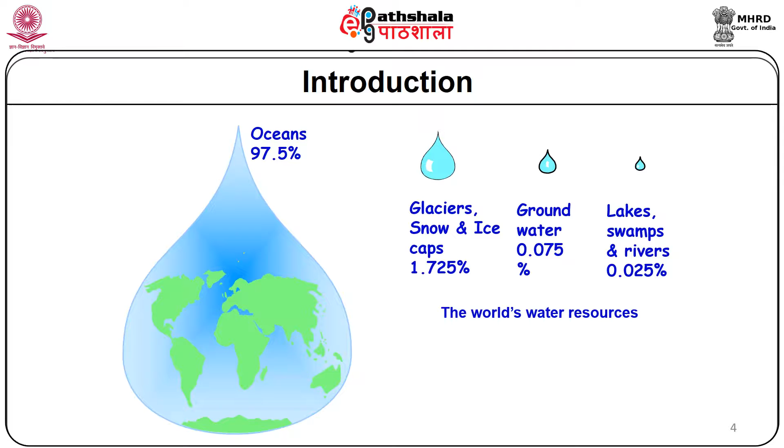As far as distribution of total water is concerned, ocean comprises of around 97.5% of the water. Glaciers, snow and ice caps constitute about 1.725% of total water, whereas groundwater just accounts for 0.075%, lakes, swamps and rivers 0.025%. The world water resources just described clearly show that the fresh water for human consumption is not much.

In the last century, the world population tripled and the use of water grew 6 times. So, water consumption had been much more than the actual population growth. It is estimated that by 2030, the demand for water will be 40% more than it is currently and 50% higher in the most rapidly developing countries that include India and China.

Population increase is likely to lead to mismatch in the demand and supply of water, and by 2030 the world population is projected to reach 7.5 billion on the low estimate side, and it is estimated to be 9 billion on medium estimate by the year 2050 from the current level of 6.7 billion people. These estimates were given by the United Nations in the year 2004. The bulk of population increase will be in countries already experiencing water shortages. Such a situation, as far as water supply is concerned, is going to be seriously jeopardized in the coming future.

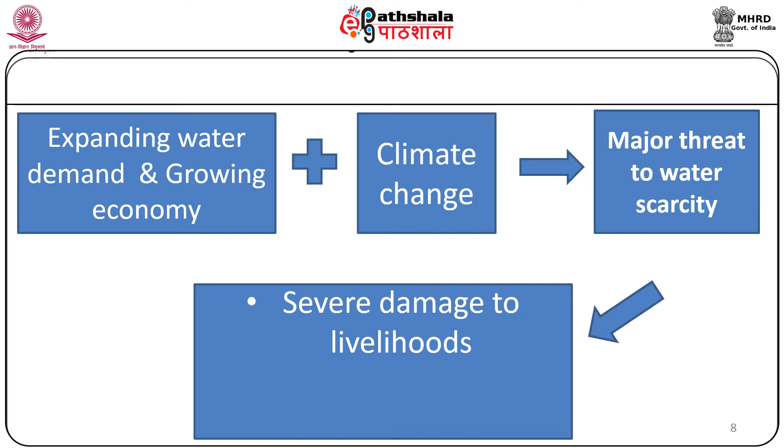According to United Nations Human Development Report 2006, Beyond Scarcity: Power, Poverty and the Global Water Crisis, water availability per person, supply, was decreasing, while at the same time the amount of water that each person was using, demand, was increasing.

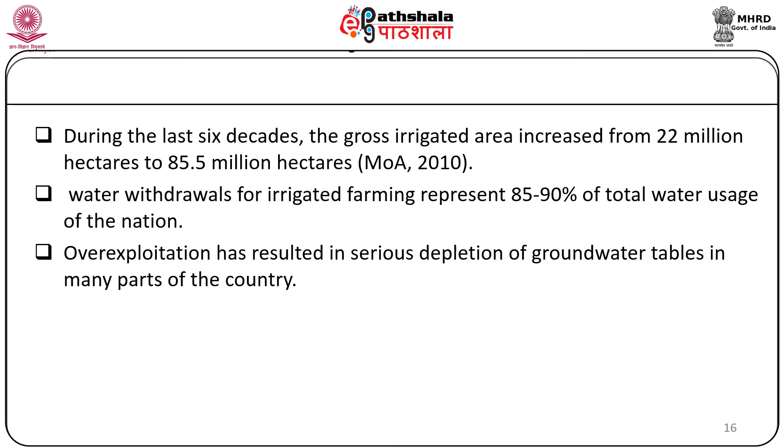During the last 6 decades, the gross irrigated area increased from 22 million hectares to 85.5 million hectares, nearly fourfold rise in terms of expansion of agricultural land for irrigation. Water withdrawals for irrigated farming represent 85 to 90% of total water uses of the nation. Overexploitation has resulted in serious depletion of groundwater tables in many parts of the country. It is estimated that in 15% of irrigation area of land, the annual extraction of groundwater exceeds annual recharge.

So there has been a significant, perceptible decline in the use of surface water for irrigation in India, because most of the surface water has not been available. There has been huge extraction, almost doubled in terms of percentages, of groundwater for the purpose of irrigation in India.

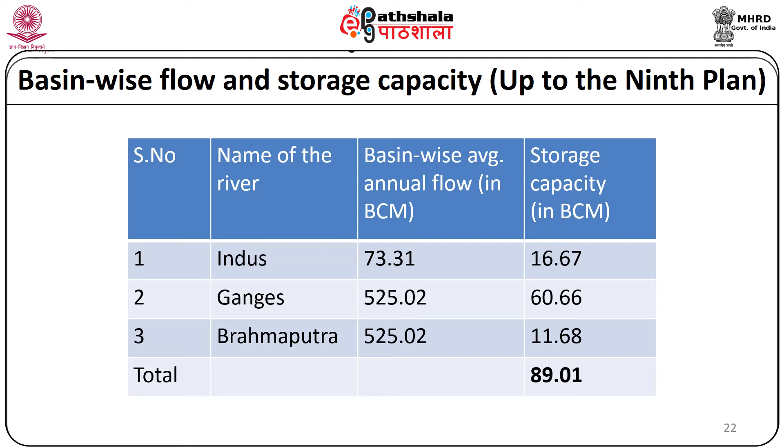Basin-wise flow and storage capacity up to the 9th plan: Indus basin-wise average annual flow 73.31, Ganges 525.02, Brahmaputra 525.02. Storage capacity 16.67 BCM, 60.66 in Ganges and 11.68 in Brahmaputra.

Low agricultural water productivity and efficiency in India would make severe supply-demand gaps with currently planned crop choices. This is based on the report Charting Our Water Future by 2030 Water Resources Group 2009. Water security for India is emerging as an extreme urgency. Water security for India implies effective responses to changing water in terms of quality, quantity, and uneven distribution.

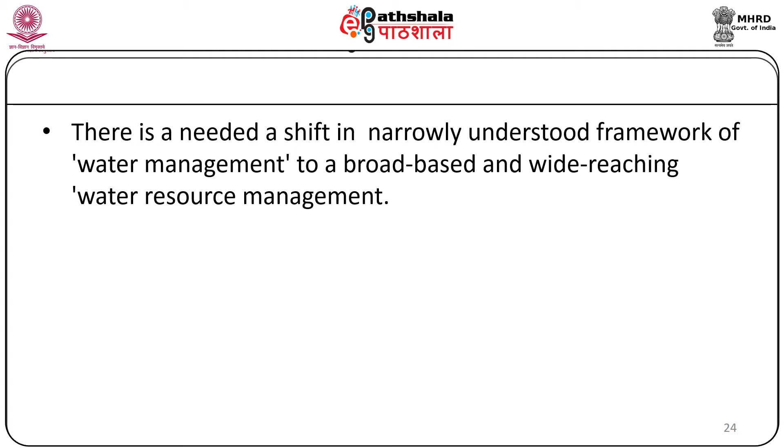There is a need to shift from a narrowly understood framework of water management to a broad-based and wide-reaching water resource management. Because, as the earlier discussion clearly highlights, the supply and demand gap, as far as water for human consumption, water for use in the agriculture sector, or water for general development is concerned, is alarming, and therefore water resource management becomes of paramount importance. This will require treating rivers, particularly the Ganges, Brahmaputra, Meghna, and Indus, in a holistic way.

So, after discussing the situation of water security globally as well as in India, with special reference to our country, we have to think in terms of recharging mechanisms or conserving water resources, and rain is the principal source of water. Therefore, rainwater harvesting becomes very important.

Rainwater harvesting is defined as the activity of collection and storage of rainwater, as well as other activities aimed at harvesting and conserving surface and groundwater, preventing loss through evaporation and seepage, and other hydrological studies and engineering interventions, aiming at the most efficient utilization of rainwater towards the best use for humanity.

Rainwater harvesting is the collection and storage of rainwater for reuse on site rather than allowing it to run off. Most of the rainwater just goes as runoff into the river and ultimately into the ocean. But here the purpose of rainwater conservation is to store the water at the place so that it can be reused on site.

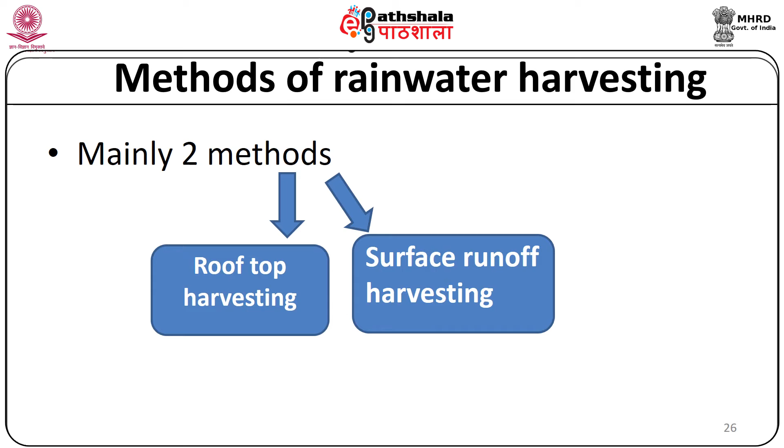Methods of rainwater harvesting can be classified into two ways: rooftop harvesting and surface runoff harvesting. When rainwater flows on the surface of the earth, it is called surface runoff. It is the excess amount of water that cannot be absorbed by Mother Earth, also called overland flow.

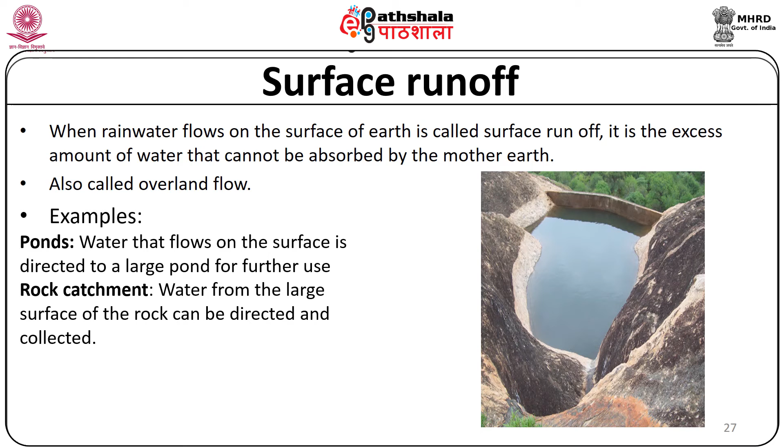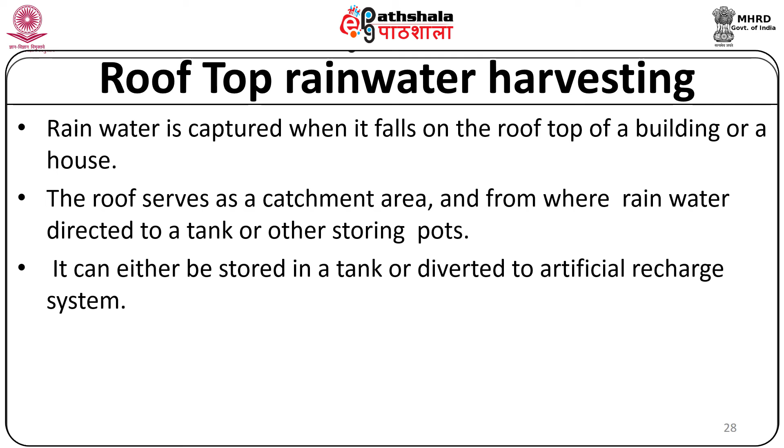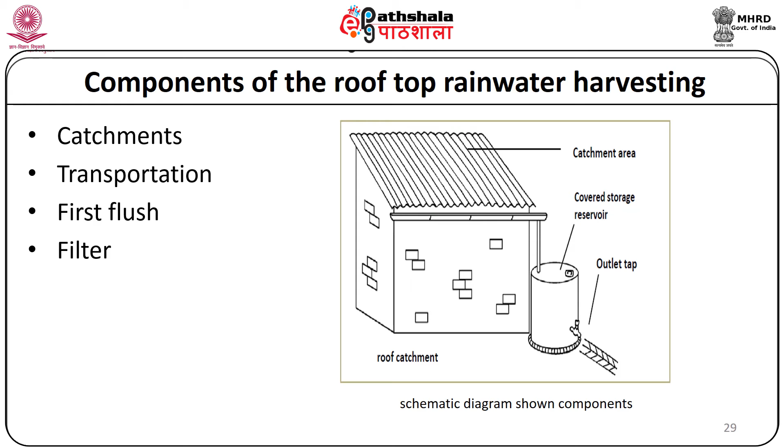Components of rooftop rainwater harvesting are catchments, that is the top roof. Then we have the transportation system, then first flush, filter, covered storage reservoir, and outlet tap from where the water can be stored at a particular place.

Catchment area is the surface which receives the rainwater directly at the rooftop. This actually determines the amount of water for harvesting. The roof of a house mainly serves as the catchment, or other surface areas like the courtyard and terrace.

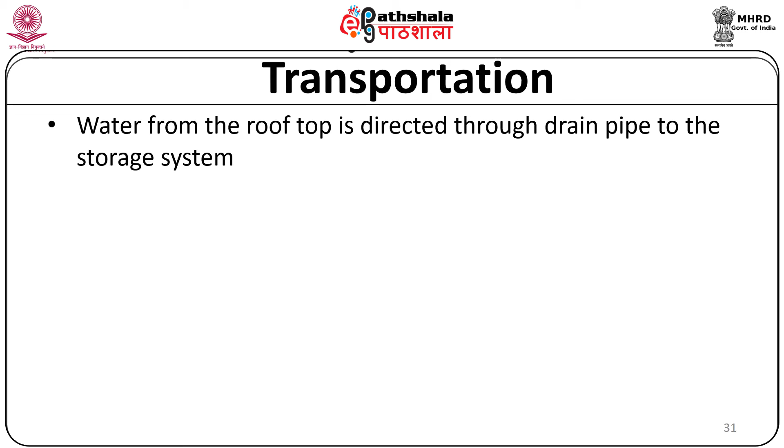Transportation. Water from the rooftop is directed through the drain pipe to the storage system. So whatever water is collected on the rooftop is directed through the drain pipe to the storage system, and that water can be used in future. It is better if the pipes are ultraviolet ray resistant. Gutters and downtake pipes are needed for the water from slanting rooftops.

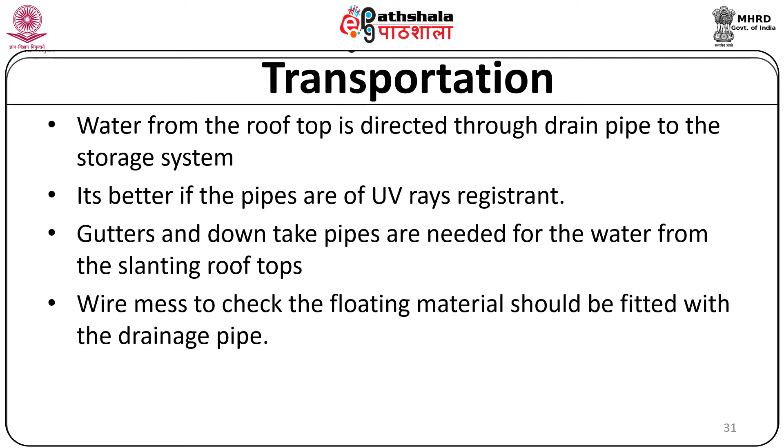Wire mesh to check the floating materials should be fitted with the drainage pipe. If the wire mesh system is not there, then many articles can go in the pipe and choke it. When the water from the rooftop is passed through the pipes, there are many problems in the water that is initially collected.

The initial part of the water has a lot of contaminants, because on the roof there will be many particles and items that may contaminate the first flush. That is why it becomes important that water collected with the first shower should be discarded, as this water contains contaminants from the rooftop, to avoid possible environmental contamination.

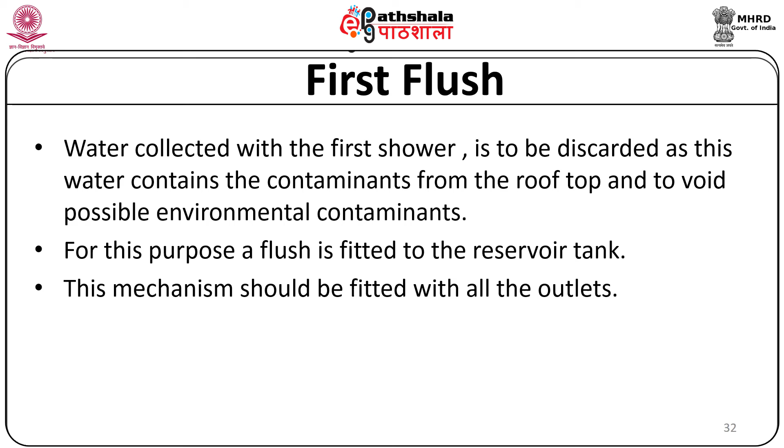So when we are contemplating storage of rainwater, we should take care that the first part of the rainwater is discarded, because it's likely to be contaminated. For this purpose, a flush is fitted to the reservoir tank, and the mechanism should be fitted with all the outlets, so that the initial contaminated water, which is known as first flush, is taken care of.

Now, there should be filters also. Ideally the filter is placed at the top of the storage tank and made up of sand, gravel, or nylon mesh; a filter may be used for this purpose. Once this filter is kept in place, many times larger particles are taken care of and they settle at the top, and only water trickles down.

The filter is an important part of the whole system, because it will hold back many solid particles. Water after the first flush should be allowed to enter the filtering process. So one has to take care that the initial first flush is not put into the system, because this will contaminate the filtration process. It may choke, because many particles can come directly in.

Advantages of filters are that they prevent turbidity, excess color, and microorganisms to some extent from entering into the storage system. So the filter has a very important role to play, as it does in water purification for human consumption. So turbidity is taken care of, excess color is taken care of, and some of the microorganisms are also taken care of by filter mechanisms.

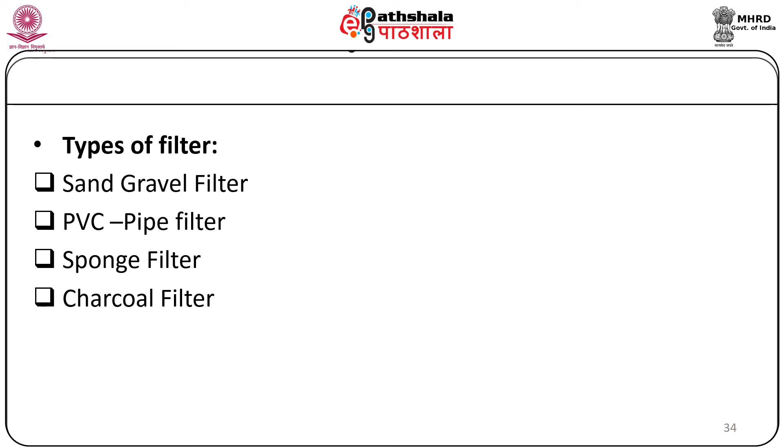Types of filter can be sand gravel filter, PVC pipe filter, sponge filter, and charcoal filter. Basically, we can classify filters into 4 categories. In sand gravel filters, water passes through and impurities are taken care of. In the PVC sand gravel filter, on the top there is sand, then filter, gravel, and so on.

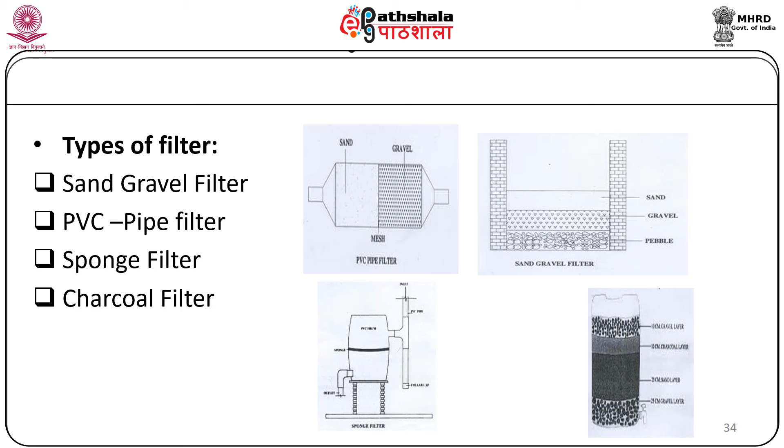Then we have PVC filter and sponge filter, as well as charcoal filters. Each type of filter has different properties, and depending on the situation, the availability of finances and other things, these filters can be used.

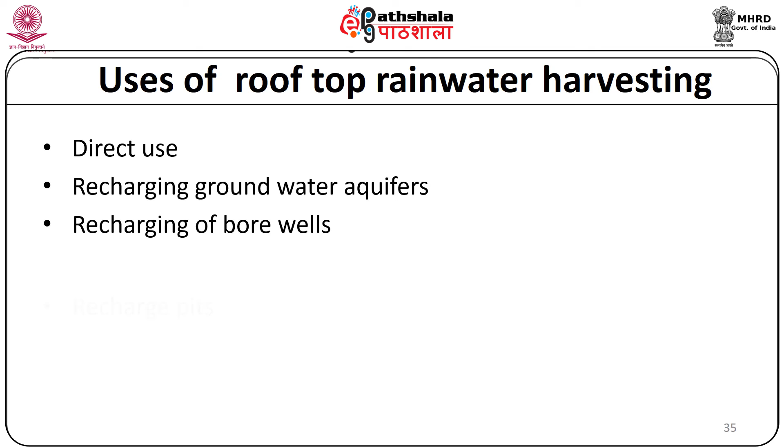Uses of rooftop rainwater harvesting: direct use, and recharging groundwater aquifers. Recharging of bore wells, recharging pits, recharging of dug wells. So rooftop rainwater harvesting can play a very significant role in recharging many things like groundwater aquifers, bore wells, dug wells, and pits.

So just to summarize what we have discussed here, the principal source of water for human use is very limited, because most of the water, 97% of the water, is present in the ocean, which is not used for human use directly or indirectly because of high salinity and salts. The water we have is used for agriculture, industries and other developmental activities, and their use is increasing day by day to meet the needs of the growing human population.